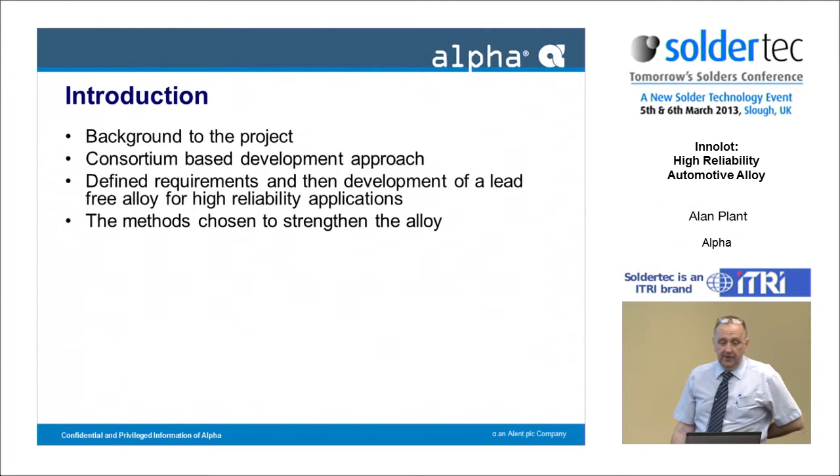We'll look at the methods chosen to strengthen the alloy, the alloying elements, defining the alloy composition - at which point it reminds me that they always say with comedians, never be the last act on, and practically everything I'm going to put, whether it be the cerium question, those sort of things come up. So there's lots of things other people have spoken about that will be repeated.

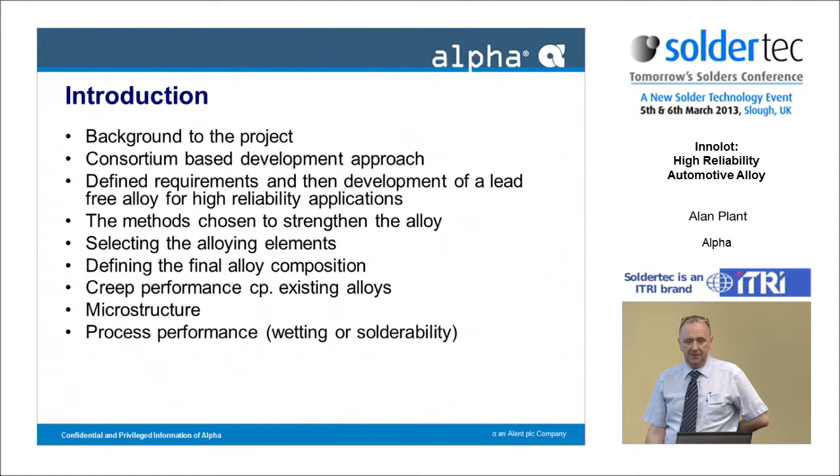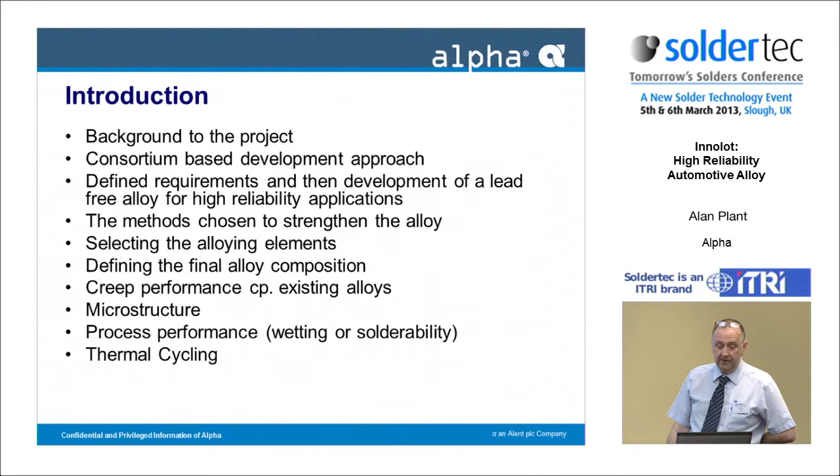We're going to look at the creep performance of the alloy and compare it to existing alloys, its microstructure, its process performance, because ultimately we want an alloy that is usable. Initially this project was for paste-related applications only, although it has migrated over the years. Ultimately, it's thermal cycling performance and something about vibration.

Right, so the project background - as I said, it's not a brand new alloy. It started in about 2000. Publication of the final results was about 2004. But in 2000, some people within the automotive industry realized that electronics modules were going to be pushed closer and closer to the area of use, reducing the amount of wiring, and that would mean a harsher environment with higher temperature and higher vibration levels.

And if we go back to 2000, in the automotive industry there were two alloys. You either had it with silver or without silver, 6337 or 62362. Great alloy, it's been there for years, but it contained lead. That was obviously going to be its nemesis.

And it didn't meet the requirement for higher temperature applications. Then in terms of lead-free, there was the copper-free version, the 96.5, 3.5 - tin silver - and also the modified eutectics based around there with an extra element. They had high processing temperatures, but their reliability potentially was limited.

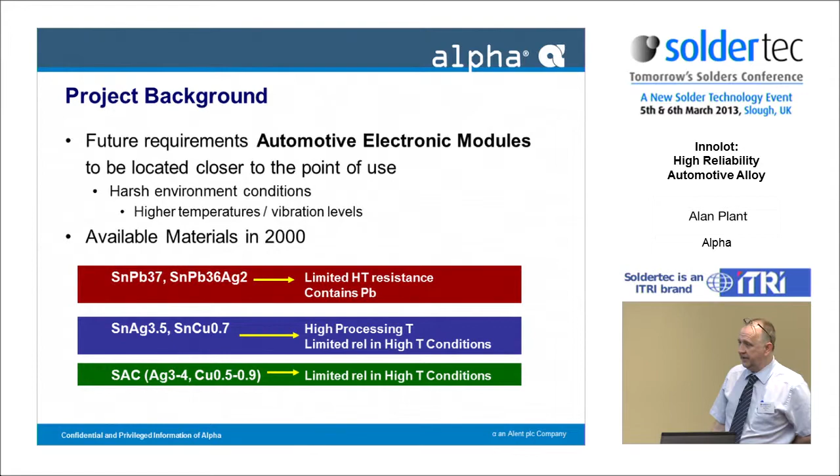And then in the more commercial electronics sector, where the move was towards the standard SAC alloys, whether by 305, 405, 387, 396 - think of a number somewhere between. Okay.

So as I said, this was a consortium-based approach. It had end users, it had leader, it had academic partners, and then it had suppliers - between suppliers of equipment, components, and also alloy suppliers. I did intend to put a pun here.

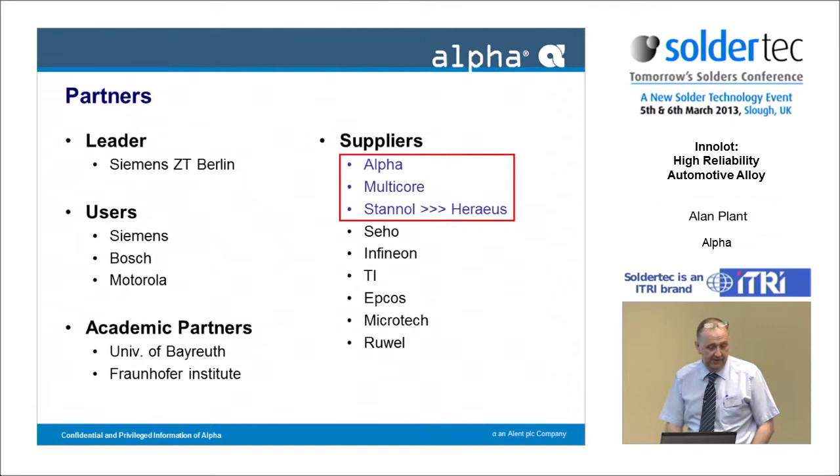The strength in this alloy, every pun intended, really is the consortium approach - that it's not a one person supplies it. There was a need and people working on it. They were the suppliers. Initially, it was Stannol, and then once the project was finished commercially, that moved over to Heraeus, who are now one of the three people supplying the alloy.

So I said we're going to look at alloy requirements. Well, the main thing was it had to be lead-free. The second thing was harsh environments. Now, depends on the publication - sometimes you'll see the figure 150 centigrade, sometimes 160. I'm not going to argue over 10 degrees really here, but typically pushing it up to 150, and we will look at what the limitations of the benchmark alloys were considered to be.

Survive 1,000 cycles of minus 55 plus 150 thermal cycling. Again, I've seen published figures saying 2,000, but the thing is to take it as far as you could.

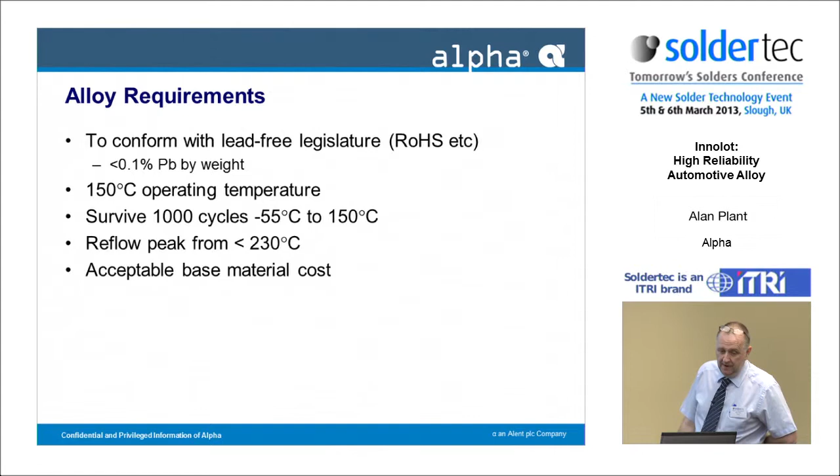Try and get a reflow temperature, ideally less than 230. Acceptable base material costs - there's no use producing an alloy using wonderful alloying elements like costalotium or unobtainium, which do tend to occur. It's great, but people have to use these in volume, so it's got to be cost effective, and have acceptable toxicity considerations.

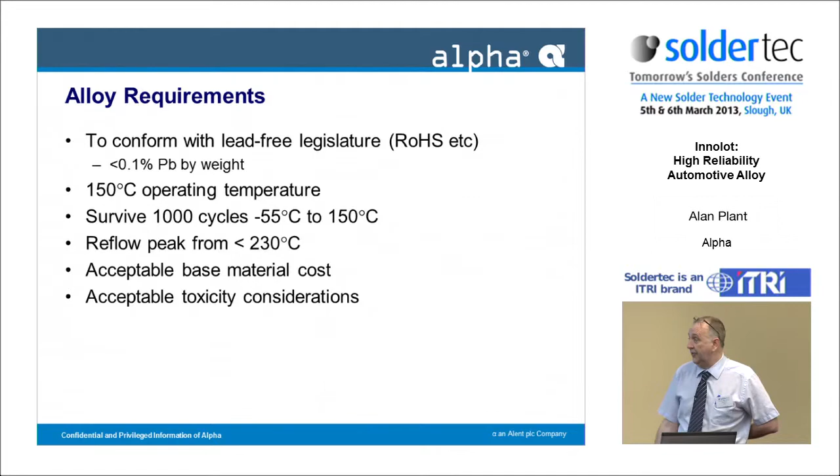So really, the project definition was how to improve the creep performance. Obviously the thermomechanical failure is a creep fatigue interaction, but the creep part was considered to be the greater contributor. So there was a requirement to increase creep resistance, and what they did was take a base alloy - in this case the standard SAC 387, considered to be the eutectic alloy.

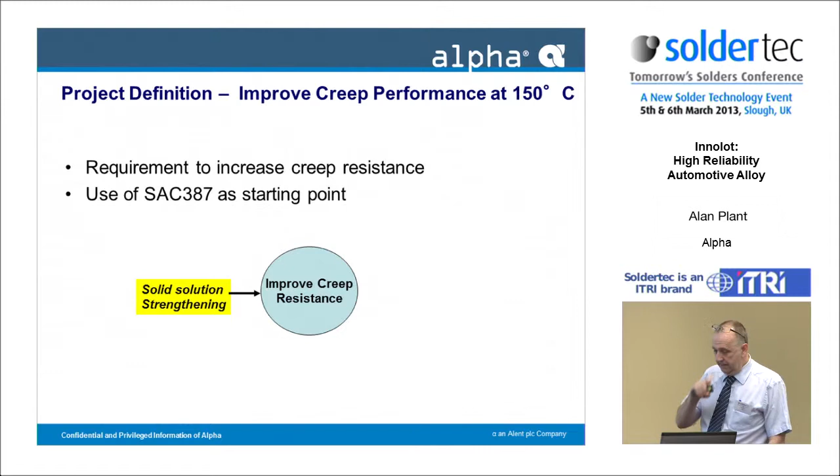So to improve creep resistance, they looked at solid solution strengthening - putting in elements that had larger or smaller atoms that inserted themselves into the atomic or lattice structure, bending that structure, for want of a better expression. And then dispersion hardening, where you were actually precipitating phases or materials out. Both methods were there to stop dislocation movement and therefore the creep mechanism.

There's plenty of papers, and I'm sure Sophie will cover a lot of this later - she's a far more knowledgeable mechanical metallurgist than myself.

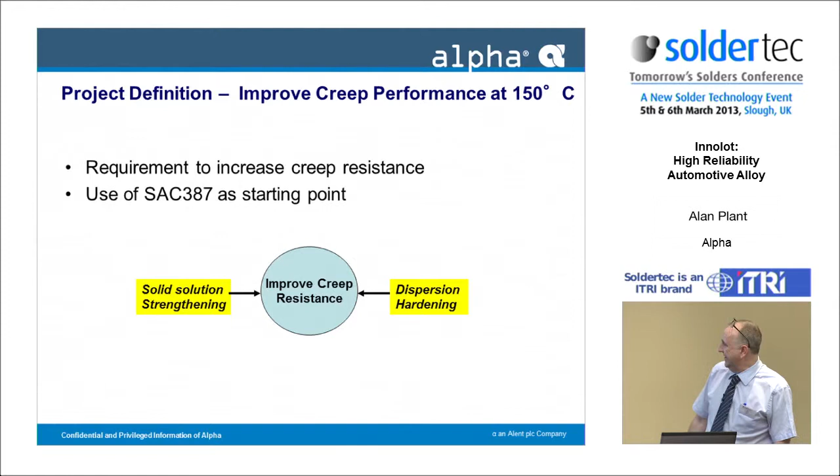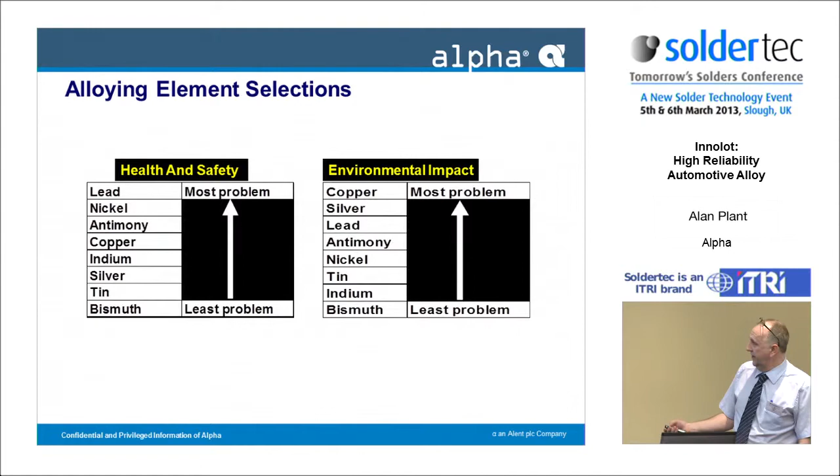So to do that, we needed to look at some alloying elements. We did consider health and safety, and we did consider environmental impact. So that was the consensus opinion, and those were the elements we had to look at.

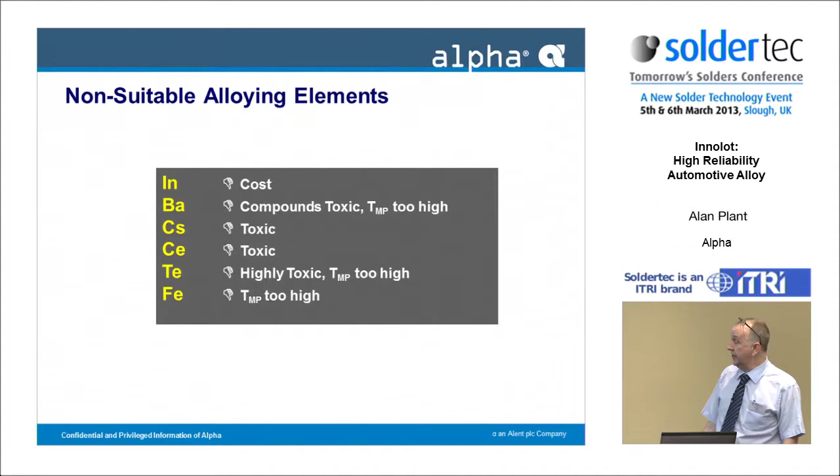There were some non-suitable alloying elements - cerium is in there, considered amongst the group just not to be the right material. Some were pushed out of the project on the basis of cost. Indium is great - a fantastic element for increasing wetting, producing some great ternary and quaternary alloys, but it's just too expensive for what they were trying to do.

So those were the alloys we considered not to use, and that really left us with a lot of the common elements that have been used in solder alloys over the years, either as binary or even ternary systems.

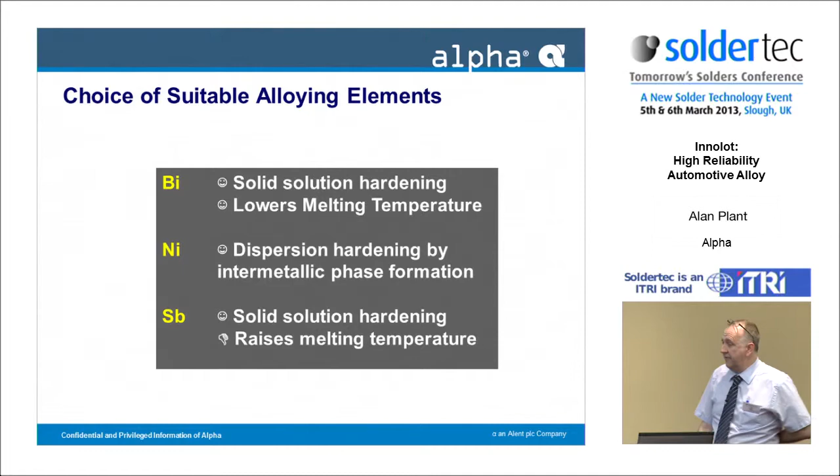So bismuth gives us solid solution hardening, and we know it lowers melting temperature - two of the things we wanted to do. Nickel, we knew it could give us dispersion hardening. And then antimony, again solid solution hardening, but the thing it did here that we didn't want was actually raise the melting temperature.

So how were we going to choose how much and which of these to add? If we look first at the creep characteristics - this is just the SAC alloy, the base SAC alloy, and then we added each one of the elements the working group looked at the creep stress.

As you can see, the solid solution strengthening is improving the performance with bismuth and with antimony, and in this case the nickel is actually slightly reduced. Now I'm guessing that's because it mops up some of the - there's not enough copper in there, it mops it up - it's possible, I'm not sure of the mechanism, but that's what we had.

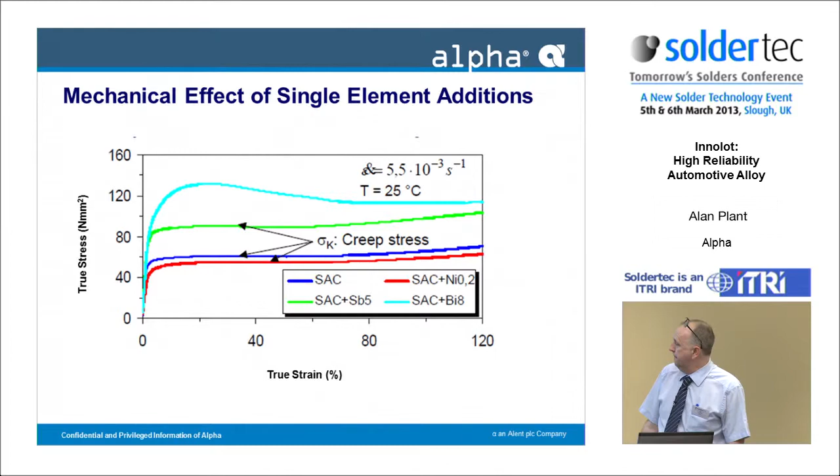So we had single element additions to make ourselves a quaternary alloy. The whole idea of this was to design an alloy with a maximum operating temperature targeted at 150.

So if we look now at the creep resistance, here we've got the figures for the tin lead alloy, and data that the end users had - they were quite happy with the tin lead performance at 80 centigrade. They would get a typical similar performance from the SAC alloys up to about 115, 120, somewhere around there. So the idea was to get the same creep performance out of the 6-part alloy at an operating temperature of 150.

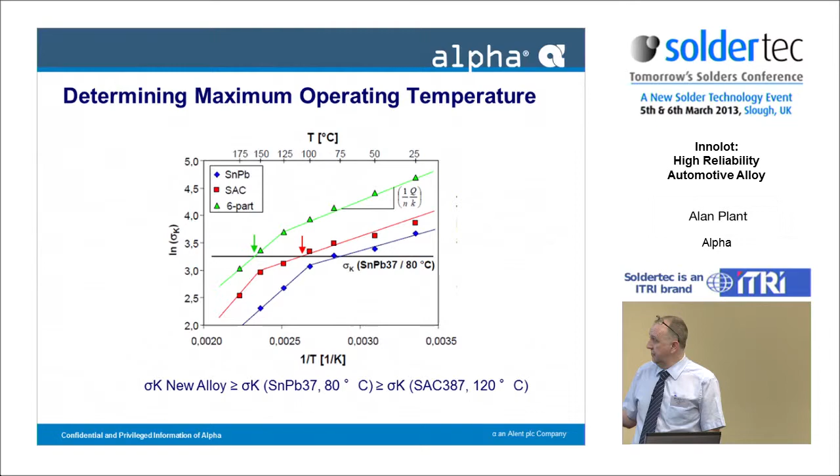Now, using that technique, what it allowed them to do was target the two things we were chasing: operating temperature and creep resistance - that creep resistance obviously coming from here.

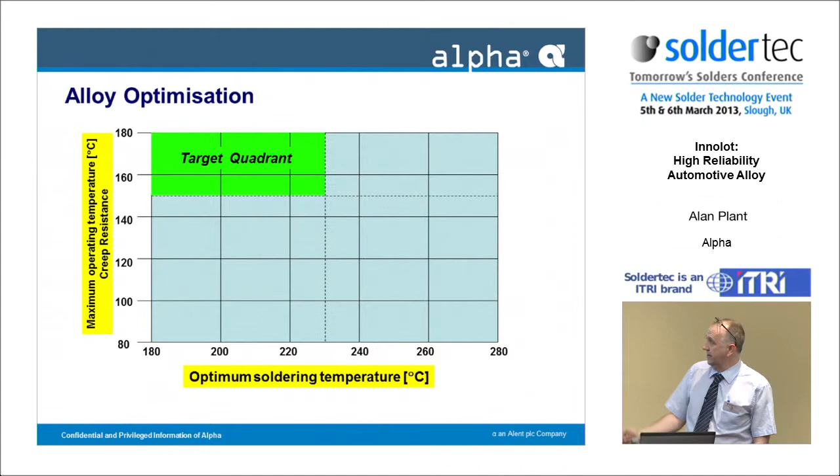And what we were trying to do is get ourselves an alloy that would use those elements but would work up in that target quadrant. So we looked at the single element additions. First of all, we've got our tin lead benchmark down here. We've got our SAC 387 benchmark.

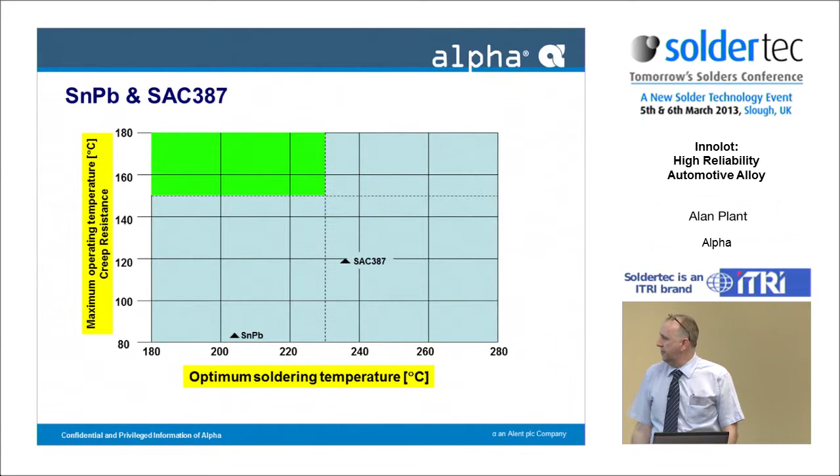So we add ourselves some antimony. Great, it increases the strength, but unfortunately it increases the temperature. The nickel, as we've said before, actually reduces the strength.

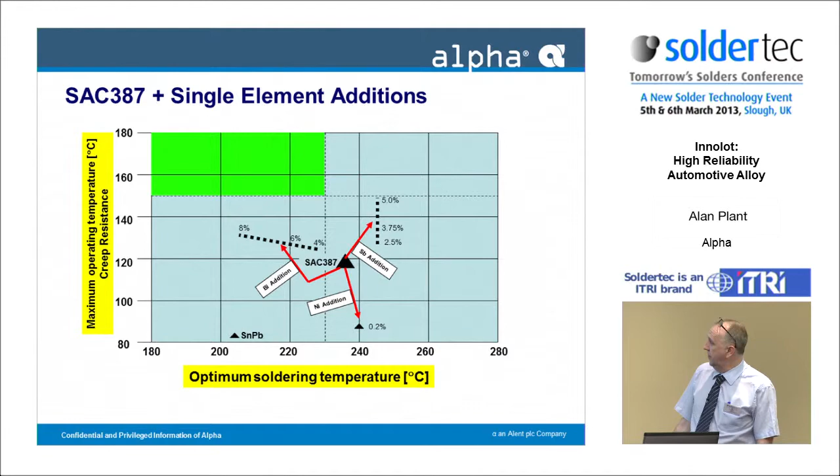And the bismuth reduces the soldering temperature and increases the strength. So it came out that the group couldn't just by a one element addition, make a quaternary alloy that would fit the bill. So what they did was look at adding a multitude of elements and came up with a 6-part alloy, which is quite a complex alloy, I guess, for a solder.

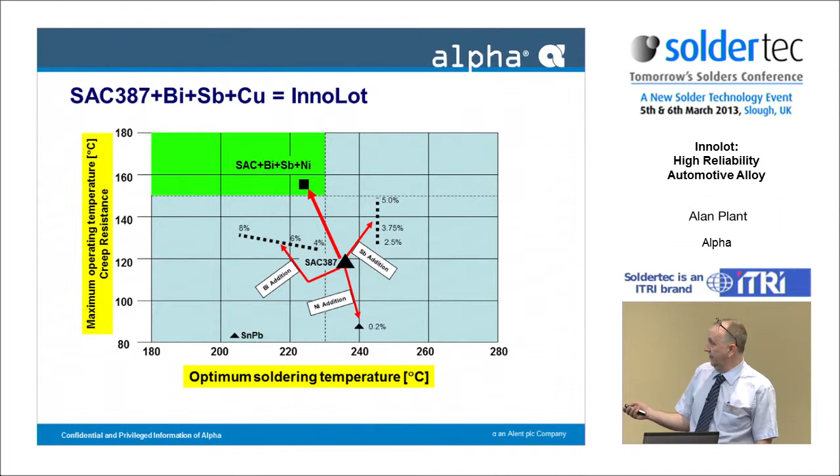And by making additions, which you will see there's a lot of work behind this, how much they added, to take us into this region, they came up with a final Innolot composition of the 387 base alloy, 3% bismuth, 1.4% antimony, 0.15% nickel.

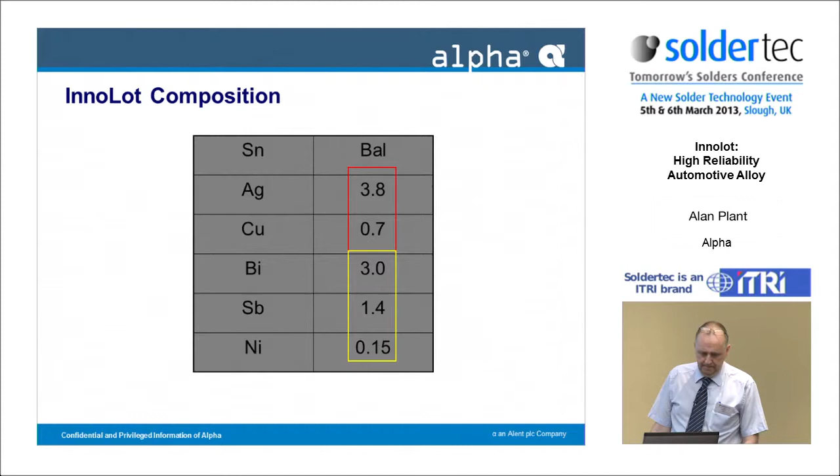Having made that alloy, what's its creep performance like? Well, here's two creep strength plots, one at ambient temperature and one at operational temperature. And as we can see, there is definitely a performance increase.

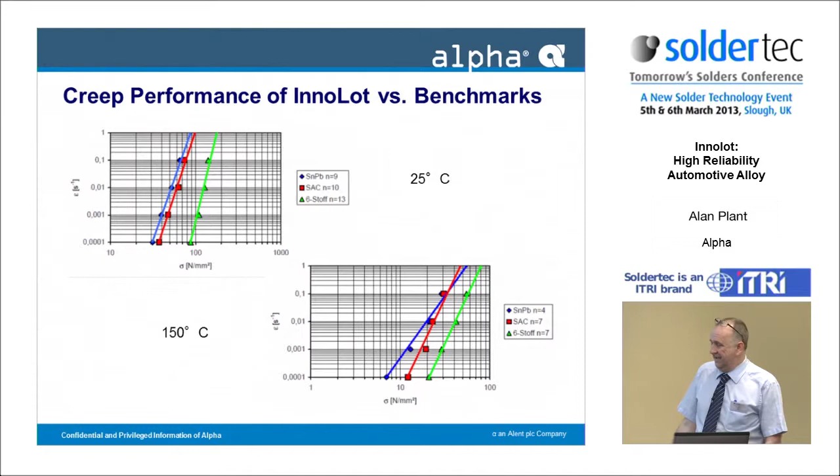So mechanically, we've ticked one box. We've got something that's stronger. Doesn't necessarily mean it's usable yet. So having come up with an alloy composition, can we use it?

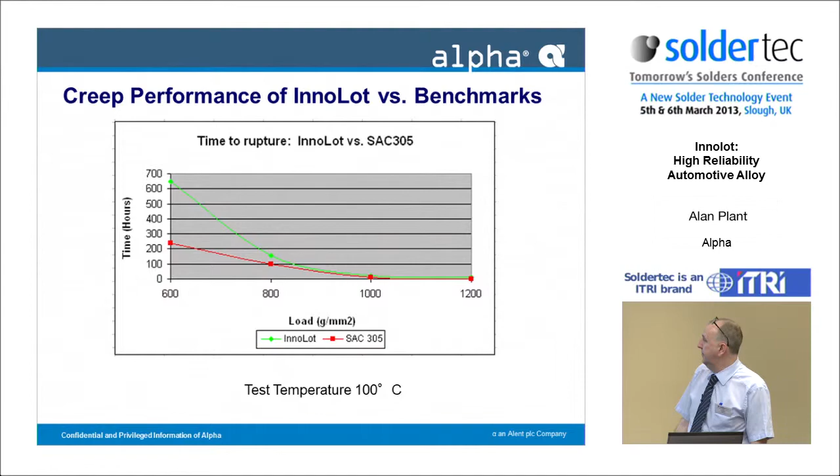Also, here's a far more, this is 100 degrees centigrade, creep rupture test, but it's really saying the same story. It's a little less subtle than the other tests, but again it's showing you there is a difference, depending on the creep stress that's applied. That was against the 305 alloy, by the way.

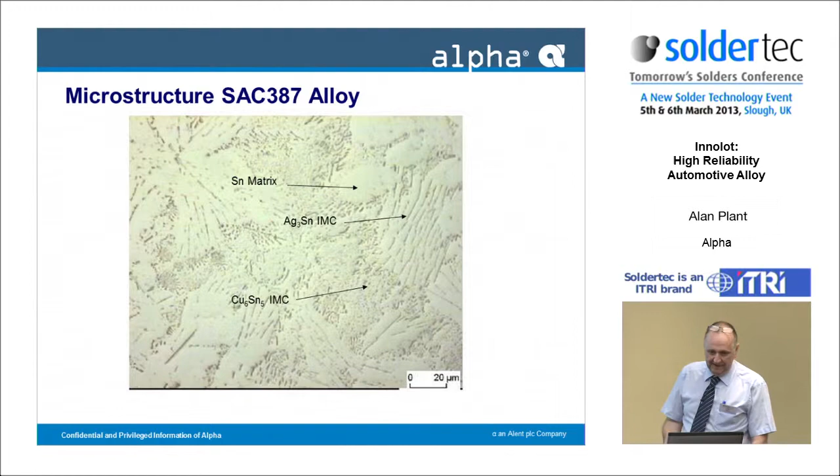Having made it a 6-part alloy, this is what we've done to it, or what the consortia did to it. They basically, you've got your tin matrix now with antimony and bismuth solid solution strengthening. You've still got your tin silver intermetallic compound, but you've now got copper nickel tin intermetallic compounds in there, giving you your dispersion hardening.

We've got an alloy. What do we know about it in terms of wetting performance? One of the targets was to get an alloy that you could use at a lower temperature. And with the DSC plots, you can see that the solidus has shifted by about 8 degrees.

It's interesting, how many thermodynamicists does it take to agree on a melting point? I think most of the people who supply the alloy say the melting range is around about that at the moment, taken to be somewhere about 206. So depending on the heating rate etc, there's a little bit of a shift, but there you go.

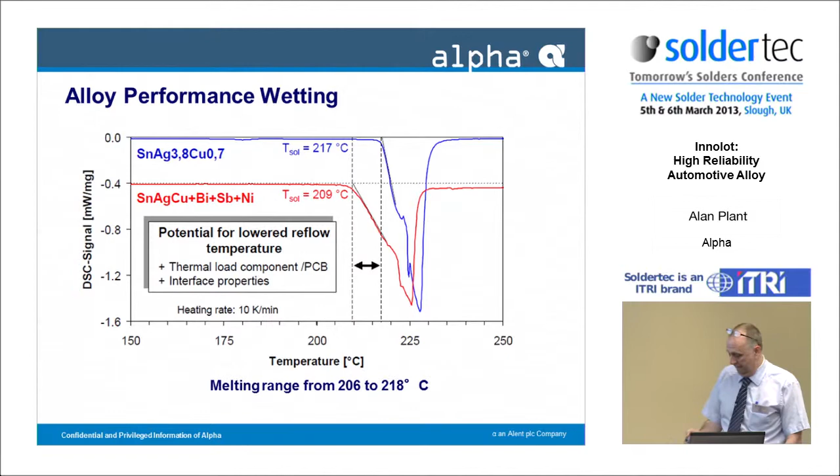Okay, so we've added these elements. What's it done to make the thing usable? As I say, in terms of wetting, bismuth enhances the wetting, antimony reduces it. So some tests were done, wetting balance tests on copper OSP.

It was done on multiple materials. We tend to do a lot of our screening tests on copper OSP materials, especially from a solderability point of view, because normally that's the hardest to solder. It's often a starting point. It was tested on different atmospheres with a constant flux type.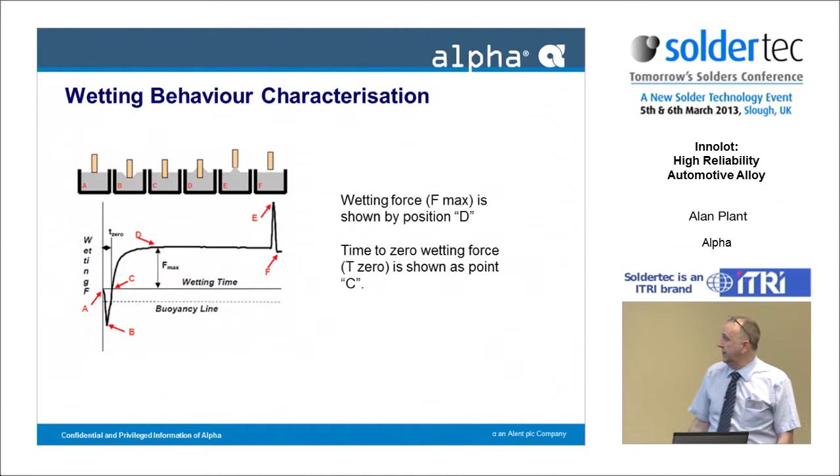So tabulated, it's not particularly easy to see or look at. The most important thing is in graphical form, the temperatures - that's what we're looking at, the wetting results.

So 225 compared to 235. The SAC alloys, you can see at 225, take a long time to wet. The degree of superheat over the melting point isn't that great really. So the Innolot does show the potential to wet at that temperature and have a wetting force.

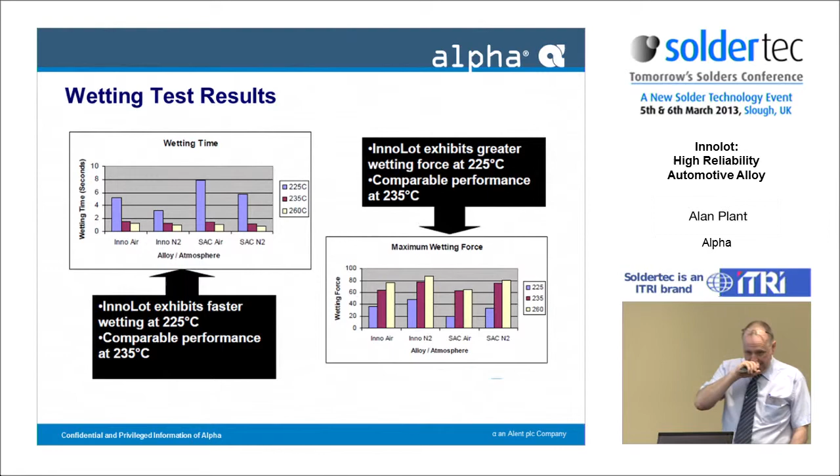So that's doing it from a wetting balance test point of view.

As a paste, we will often do things like a paste wetting test where we print tram lines with different spaces - two tram lines on each, with varying distances, and you look at how they join together. That's another numeric way of doing it.

We tested that and found how it performed on each of the different finishes. But really, there is no substitute for the real world, and this wasn't part of the original test.

This is a great assembly because it's on an aluminium-backed PCB and has a massive delta T. So this happens to be a big surface mount transformer, and here you've got some small QFN, an SO device, and these will typically be 240. I happen to know that part is reflowing at 229 centigrade, and they're producing the product day in, day out - it will reflow at 229.

I am going to mention a bit more about the lowest temperature again in a minute.

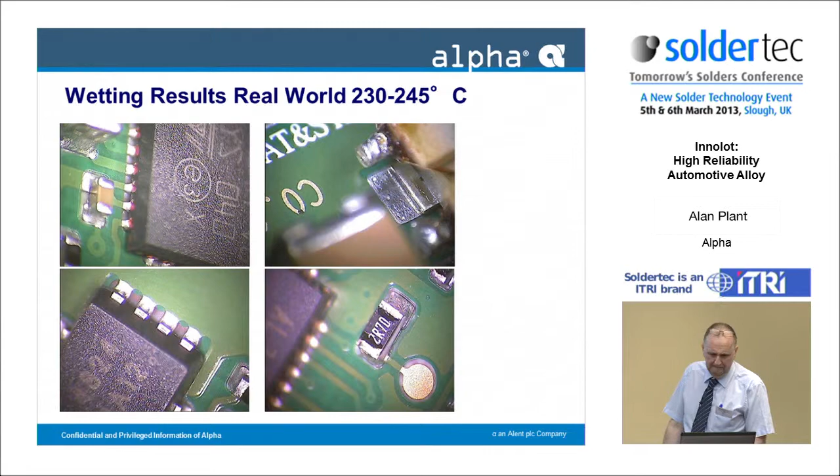Okay, so we've got an alloy. We've done something to make it mechanically stronger. It looks as though we can use it from an applications point of view, from wetting.

Has it achieved the final target? That is, has it strengthened the alloy in terms of thermal cycling? So here we have the base alloy, the Innolot, here, the SAC alloy there, -40 to 150 thermal cycling in groups of 250 cycles. This is on resistor and capacitor components, so there's no compliant leads.

The components in this particular case tended to show first failures in the end user environment, and we can see a clear shift - the Innolot are not showing initial failures anywhere near as soon as the standard SAC alloy.

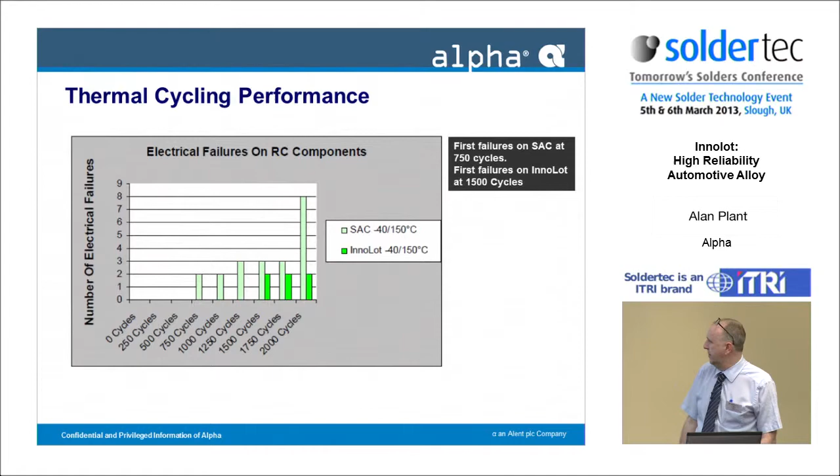A measure of shear testing of capacitor components again after thermal cycling, and the reason people are doing this is because obviously you do get some degree of joint damage, and it's trying to really assess how much of the joint integrity has been lost, how much is left after it's been shake, rattle, rolled, or thermally cycled in this case. And here we've got two sets.

That's -40, 125, 1,000 cycles; -40, 125, 2,000 cycles; and -40, 150, 1,000 cycles, i.e. the target condition. Then the residual force to shear the components off. Whether it's the amount of residual joint or the inherent increase in shear strength of the alloy - I'm sure it's a bit of both - the Innolot does show a higher residual strength.

Testing again now after thermal cycling, but at elevated temperatures, and you can see that the Innolot clearly outperforms others. Now, one interesting thing here I don't know the answer to - it's only a small sample here - is that the Innolot appears to actually get stronger, then drop down.

Now, whether or not this is some of the aging type phenomenon that we've heard about - and almost certainly it will be, because if you look at other solid solution strengthened and also precipitation hardened materials, there's a lot of age hardening goes on there - it may well be that there is some growth of the particles.

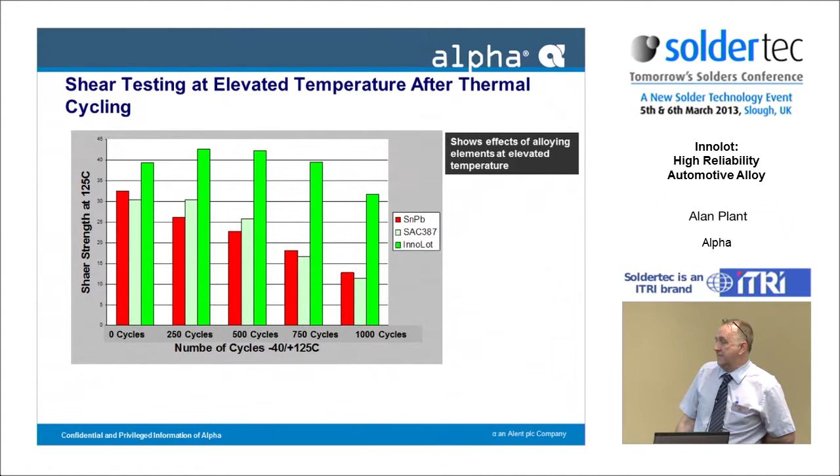Okay, and then finally vibration testing, and we had a discussion earlier on about whether the vibration test is done here as thermal cycling and then vibration, or done at the same time.

This is just a snapshot of the data. We're basically finding that both the force and the time, the duration of the vibration for the SAC, is a lot less than with Innolot.

It does seem to meet the requirements that were set of it.

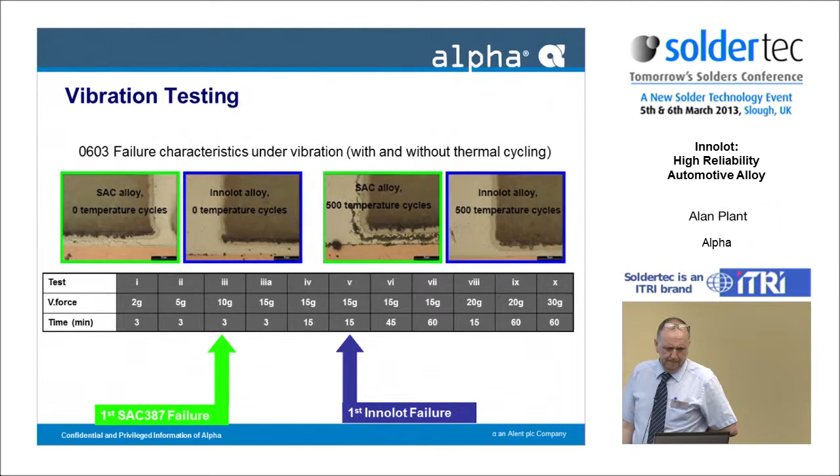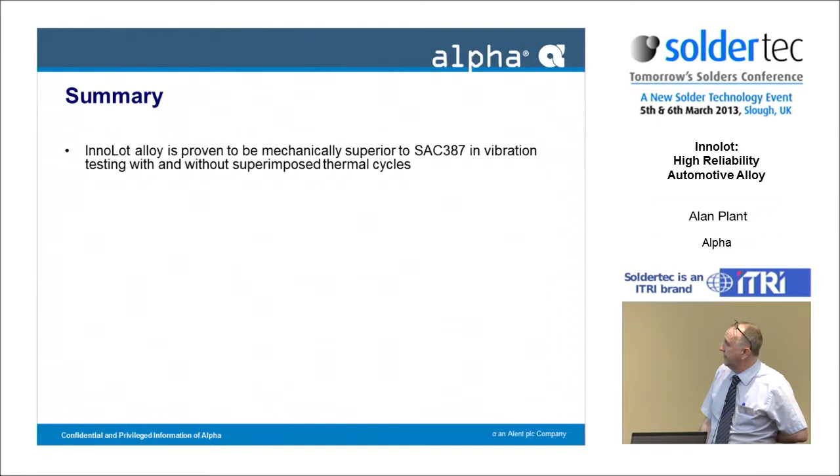So in summary, in the original work, Innolot alloy has been proven to be mechanically superior to 387 in vibration, with or without superimposed thermal cycles. In thermal cycling, it has definitely been proven both in the laboratory and, as I see, end users adopt it.

There are really two forms of end users: those originally in the consortia who developed it for their own use, and now what I call late adopters who found they're reaching a limitation in SAC 387 in an assembly. A lot of these people will do things like, if they have a problematic component, moulding compounds, or maybe a type 1 T-SOP - type 1 T-SOP's off the use list - a particular size of large ceramic component, they've done all of that.

Now they need to get an assembly which has got the already approved group of components. And what you're finding is that the reason this is happening is that, especially in the automotive industry, the test requirements are getting tougher and tougher as warranty periods are going up and up.

The end purchasers of the assembly from the OEMs in the automotive industry, who may make engine management systems or braking systems - at one time it was 500 cycles, now it's 1,000 cycles, now it's 1,500 cycles. There's still the argument whether these test regimes bear any relation to final life, but people are saying you've got to test it more aggressively and longer, and 387 or 305 is running out of steam.

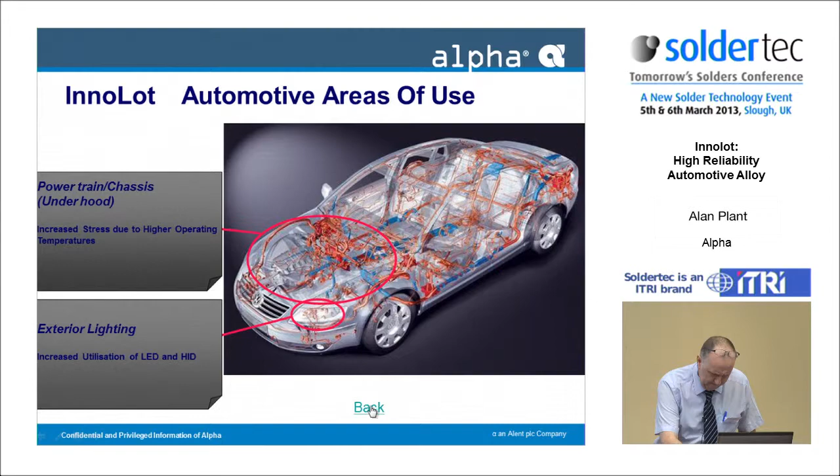It has a melting range from 206 to 218. Reflow recommendations - if I was starting, I'd always say 230. You can push it lower, but you've really got to do a lot of due diligence. I'm very comfortable with the 230. That can be done, but you're pushing the degree of superheat you have at a melting point. It's quite a low margin.

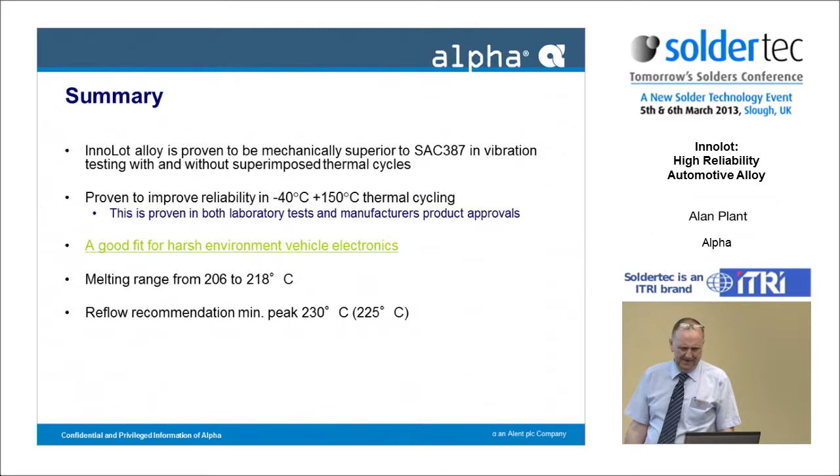It's available in paste, preform, bar, solid wire, cored wire. Certainly the wire is an interesting case - they made an alloy and then wanted a wire, and everything they did to the alloy to make it creep resistant made it wire manufacturing resistant. So the manufacturer partners have had to go to extrusion-based techniques, and it's available currently from 3 suppliers, of which we are one. So the good thing is that if you like the alloy but don't like a company, or you don't want a single source, there is an option not to single source.

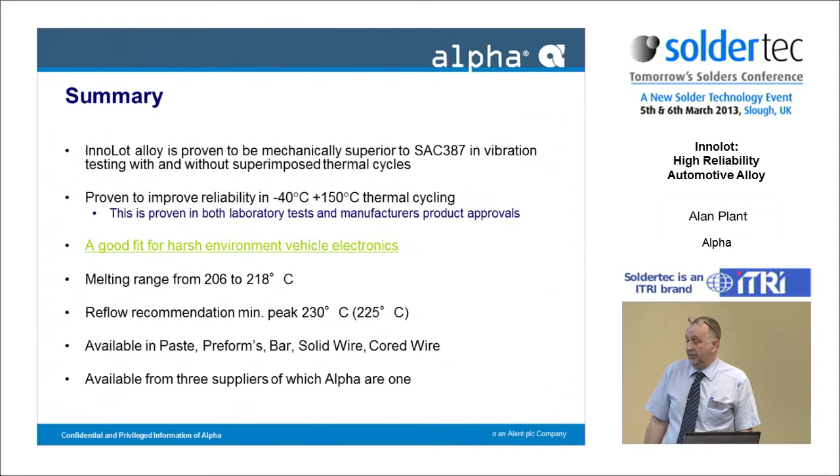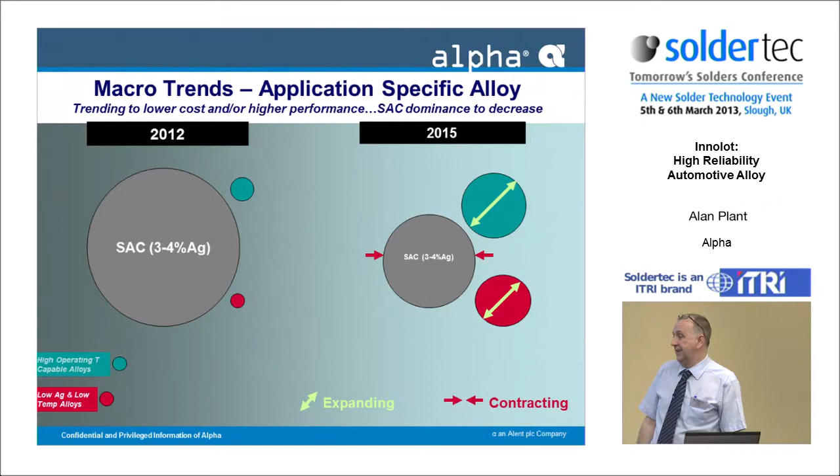Just one last thing that goes with Dominic's roadmap - we do see potentially in the automotive sector that the usage of SAC alloy will shrink. There'll be some low silver and low temperature for certain more benign applications, but we do see that potentially this alloy and any other alloys introduced that do similar things will be growing, because the environments are only going to get more and more harsh. That's it.